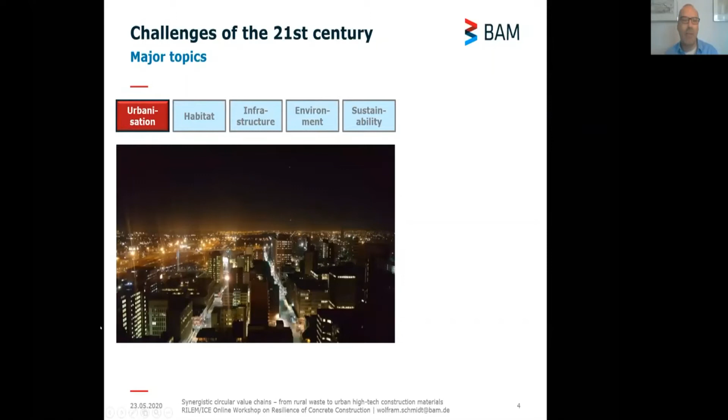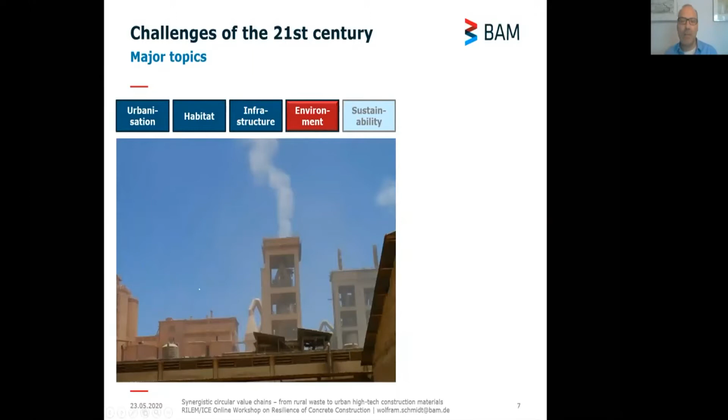We have to make sure that the growing population has a decent way of living, and people have to be connected, and the lifelines of human beings are infrastructures. But this all has an impact on our environment. And certainly we also have to discuss issues of sustainability as soon as we exploit resources.

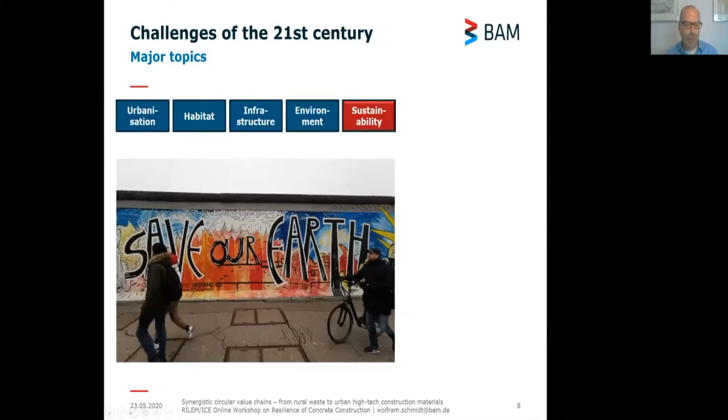If we take a closer look at these 5 items that I've mentioned, we will see that concrete has a prominent role in that, because it's involved in all of these items to a certain extent, because concrete is everywhere in the world. Everything we build is kind of linked to concrete construction. Some researchers found that concrete is about 50% of everything by mass that the world produces.

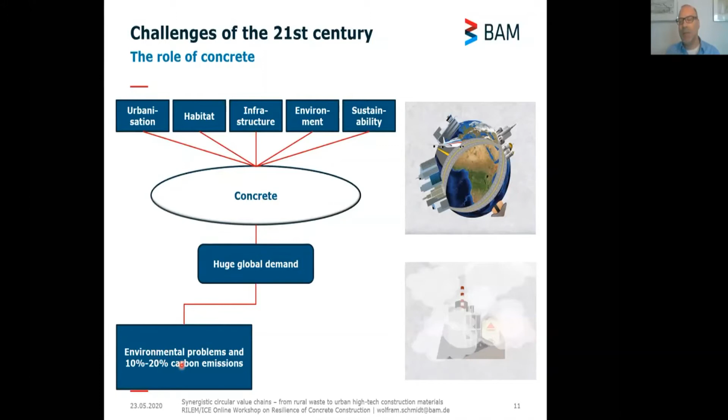That's a huge lot. And considering that, the 10 to 20% of carbon emissions that are being produced by the concrete industry globally are relatively small, but it's still a very high number. And the other thing is it's kind of inevitable because we don't have alternatives to concrete. Any other construction material is not available at the same amounts, and mostly it would be much more environmentally polluting and produce much more carbon emissions.

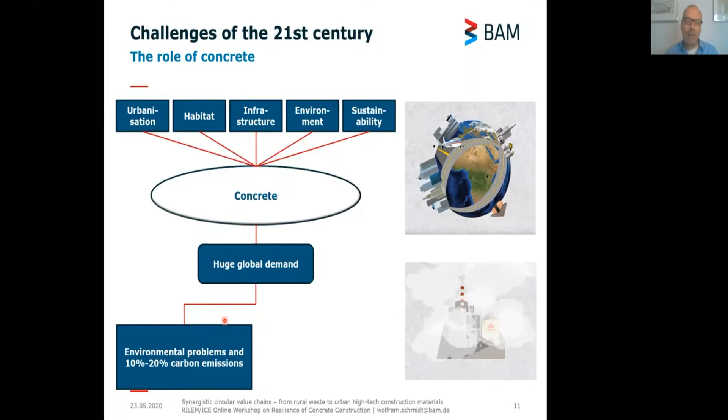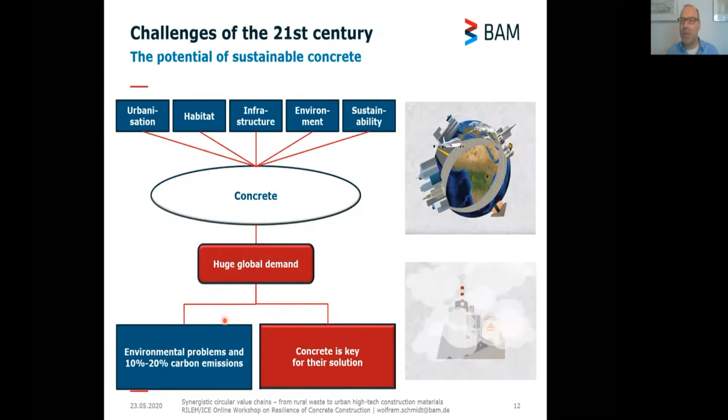So instead of complaining about this huge amount of concrete, we should also consider it as a potential, because if it is 50% of everything that the world produces, it's a high leverage if we can change something there. So let's see this as a potential and try to develop concrete technologies which are more sustainable.

Concrete technologies that use more sustainable cement types, better concrete types that use less cement but probably higher quality cement and concrete, and do the same but with much lower environmental impact.

And then urbanization becomes a very prominent role, because all the challenges that I mentioned here are linked to urbanization. We want to build houses, we want to build infrastructures to get the cities connected with the world, but at the same time, while we are building structures, we impact on the environment.

We change the environment permanently. And by changing the environment, we use resources which has an impact on sustainability. So urbanization is one of the key driving aspects we have to look at in the future.

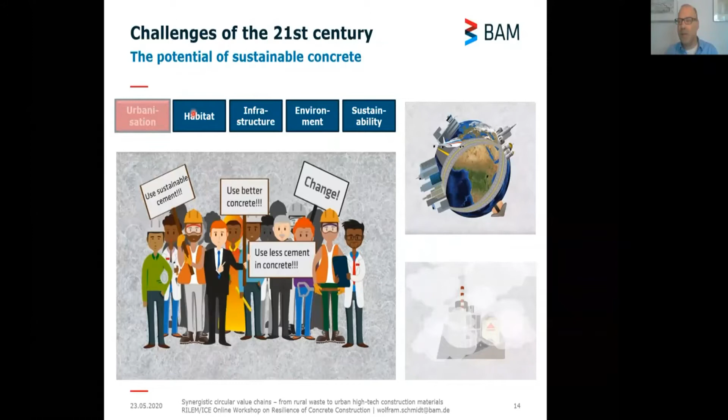And now, since this workshop is on resilience, and resilience is much considered as a structural issue, I think it is important to also discuss what resilience can also mean. Certainly, it means structural safety. We have to take care that the structures are durable, that they withstand the loads, and so on.

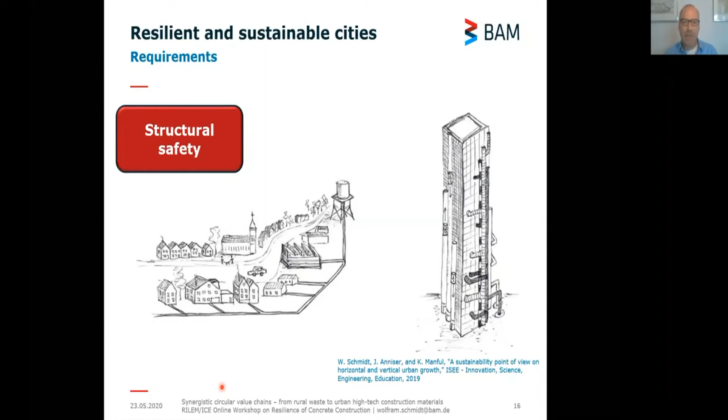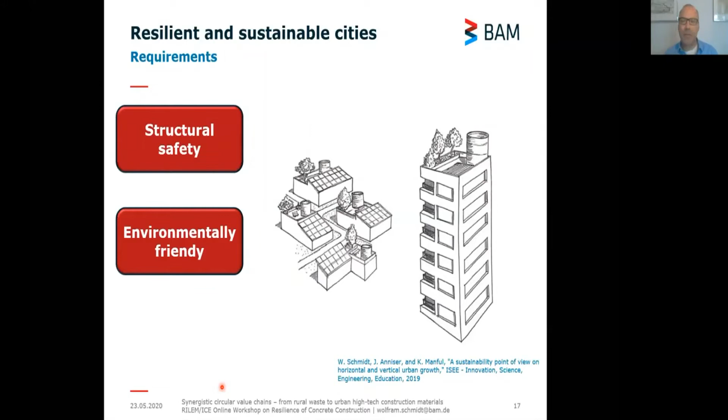But at the same time, in the future, we have to take more and more care that structures, concrete structures, urban structures, are more environmentally friendly. The entire life has to be more environmentally friendly in the future.

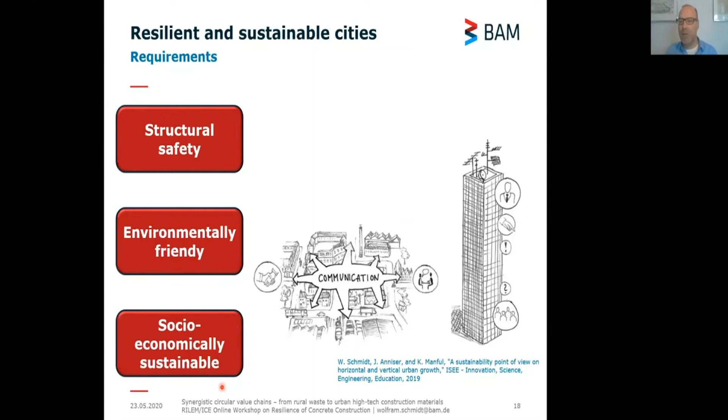But we also have to make sure that the cities of the future are made for the people, that there are livelihoods, that there are good communication paths, that they are integrative. And this all makes out a resilient urban structure, a resilient urban environment, and certainly also our concrete structures have to make sure that these parameters are fulfilled.

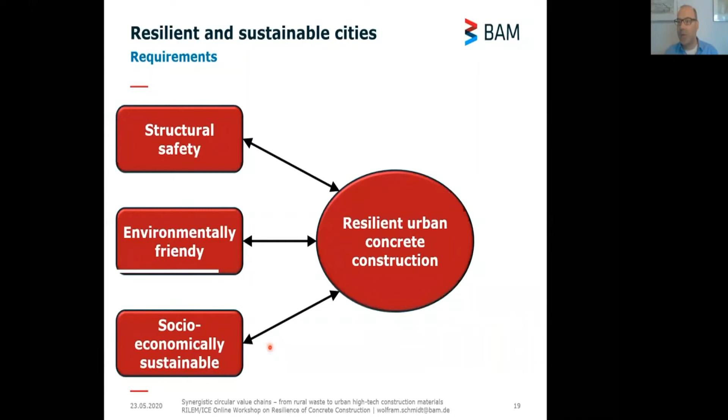So the problem is that this is wishful thinking, but urban structures today often are not like that. Therefore, we have to look at the future. Where will the urbanization processes take place in the future?

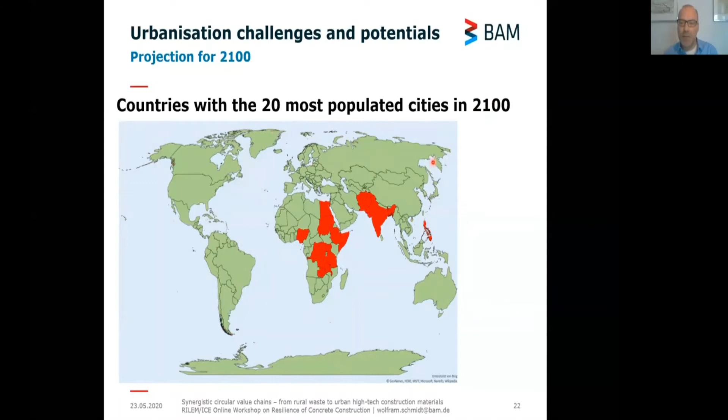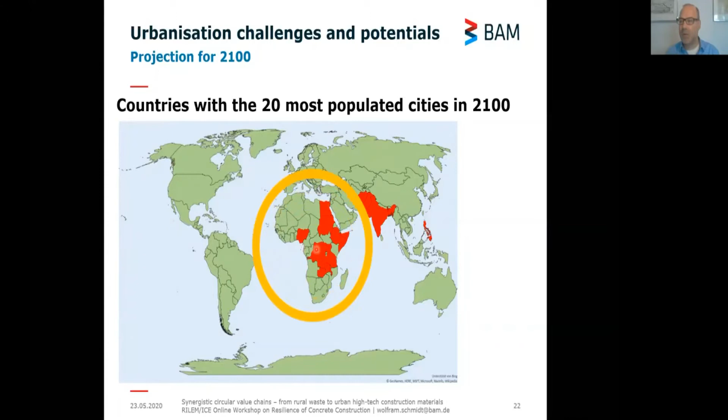Indeed, 13 out of the 20 most populated cities, according to this study that I've cited here, will be in Africa. This will be led by Lagos, Kinshasa, and Dar es Salaam, with 88 million, 83 million, and 74 million inhabitants respectively. So there is a dramatic development.

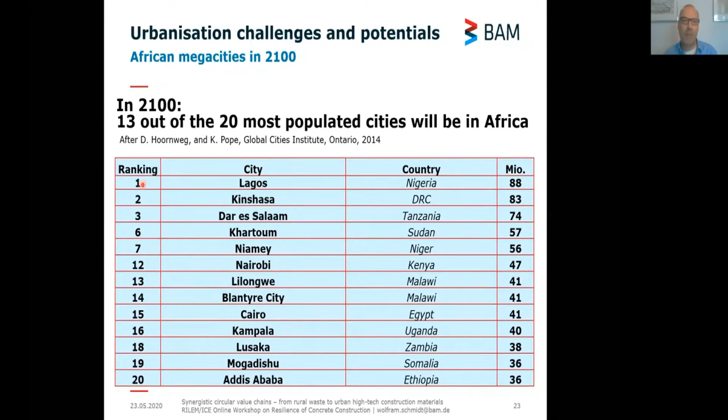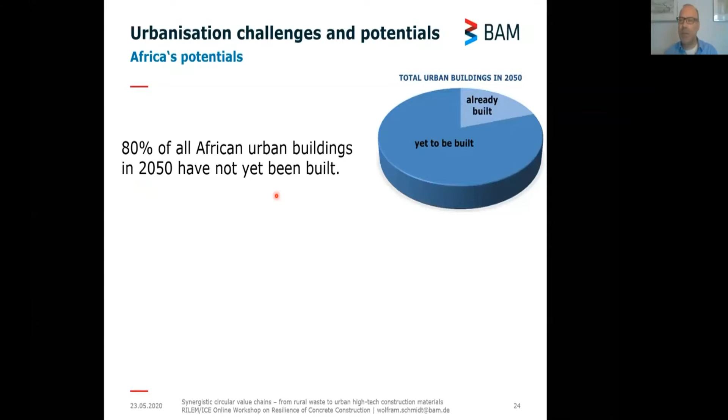And this certainly causes a lot of challenges, but at the same time we can see it as a potential again, because at the moment, from those urban structures that will have been built until 2050, only 20% are already existing. That means 80% of the urban structures which will be built over the course of the next 30 years are yet to be built. This is not much time, but it's a tremendous potential to build these structures more sustainably than in the past, to avoid the mistakes of people that built less sustainable structures in the past.

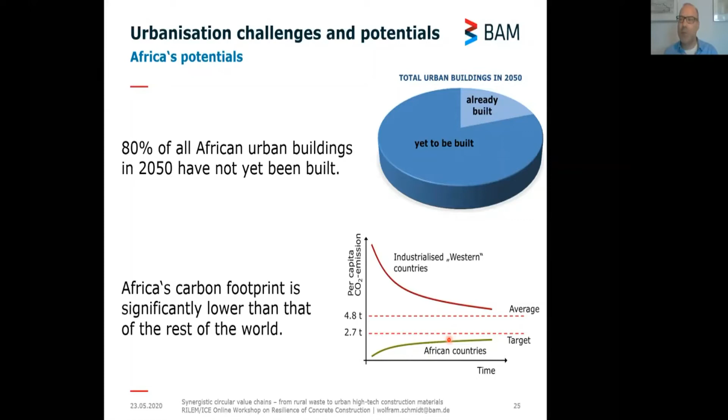Looking particularly at the African continent, it offers a lot of potential because, unlike the rest of the world, the per capita carbon emission, let's say the individual carbon budget, is significantly lower than in the rest of the world. Some studies say there is an individual carbon emission budget of 2.7 tons to avoid our temperatures increasing by more than 2 degrees Celsius in the coming years. Africa is the only continent that can reach this threshold from below; all other countries have to come down to get to this threshold. So the potential position of Africa to be innovative, to be more sustainable, is tremendously good.

But it's not only the urban areas that are growing, it's also the rural areas that are growing. At the moment in Africa, only 40% are urban and 60% are rural, but the average annual urban growth in sub-Saharan Africa has only been 4.13% in the past 20 years. It's not that there is an exodus from the rural areas to the urban areas — the rural areas are also growing — but the cities just grow so much faster, more than 2 times faster than the rural environments.

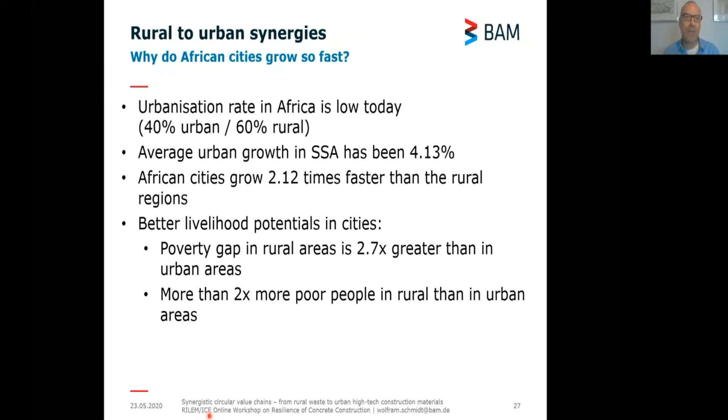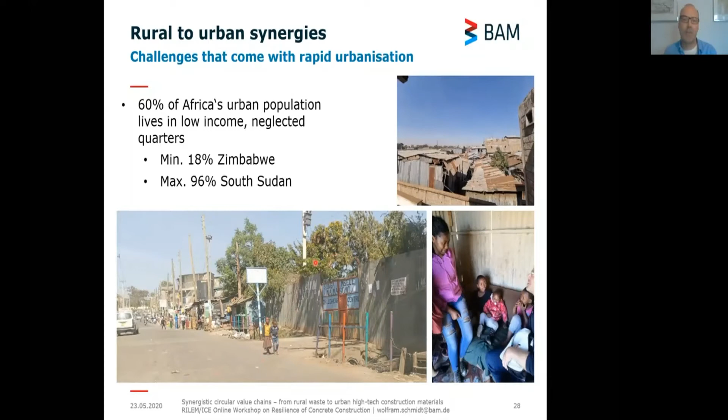On average, all over the African continent, about 60% of the urban population is living under very miserable conditions. In Zimbabwe it's not that bad, but in South Sudan it's really dramatic, with 96%. This is a majority of the urban population living under these conditions, and these people should probably have a voice.

Last year, I did a workshop at the Star Kids Initiative with children from Mukuru. It's a place which, in Western societies, people would probably call a slum. These children are collected from the streets, and Star Kids tries to get them back into a good education, to mentor them and to foster their talents.

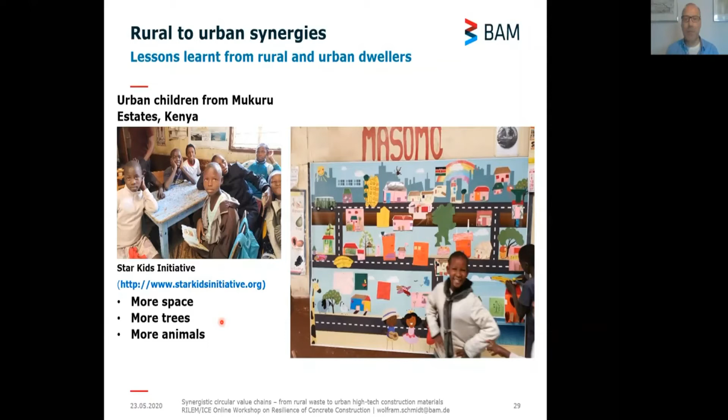We did a workshop and asked them, what is the city of the future? Here on the right side, you see how the children dreamt of a city of the future — this is more or less what we crafted over the course of the workshop. One of the results was that the children were dreaming of more space, more trees, and more animals. If you think about that, this resembles pretty much a rural setting rather than an urban setting.

Just a couple of months ago, right before this entire corona thing started to spread all over the world, I was in Tanzania, in Bagamoyo, which is a rather rural setting, and I did a workshop with girls and young women from Bagamoyo at the Forward Step organization. They are trying to mentor young girls and young ladies, and we did a workshop on science and engineering and women in science and engineering disciplines.

But I also asked them how they would dream about the environment in the near future, and it was interesting that they said they dream of short distances to services, a health infrastructure, and access to education.

So this resembles pretty much like an urban setting. This could be considered a kind of paradoxon, or you could also say everybody is dreaming of the greener pastures on the other side of the fence. But basically, it is not a paradoxon. You just have to consider how we can sort out this problem.

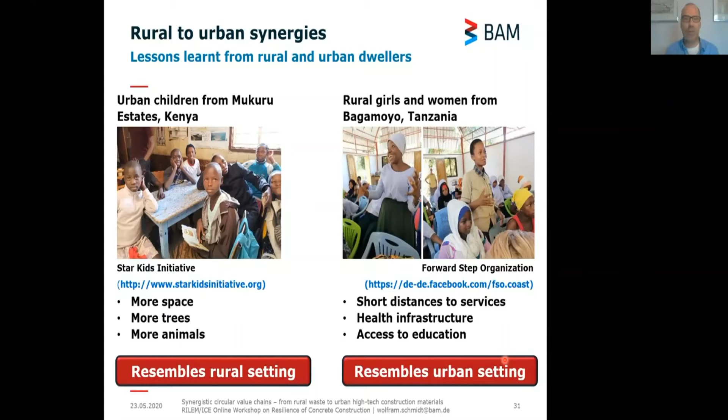One thing is to slow down the overdevelopment of already developed regions. We should also put resources into accelerating the development of rural regions. And in order to fulfill both of these requirements, we have to think about new ways. But at the moment, there are little driving forces.

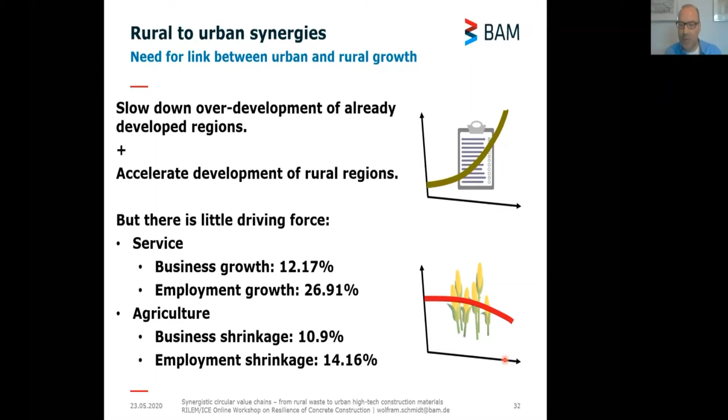We can see that in sub-Saharan Africa, the business growth and the employment growth in service was 12% and 27% respectively, while service is a very urban business. Agriculture had a shrinkage in business of 10.9% and a shrinkage of employment by 14.16%. So there's no driving force to invest into the rural regions, while at the same time there's a lot of driving force to invest into the urban regions.

So what is required is to develop synergies between urban growth and rural development. It's getting pretty clear, because urban growth requires concrete, mainly high-performance concrete for vertical growth as well. The entire world requires better concrete technologies, more sustainable concrete technologies. This will be to the benefit of the entire world.

And what do the rural areas provide? This is a vast amount of waste from agriculture and from mining, but I will focus on agriculture. If we can create synergies, the way to get these done is to develop high-performance construction materials coming from rural areas, and this will be to the mutual benefit of the rural areas and the urban areas, but at the same time the entire world will have an advantage from this.

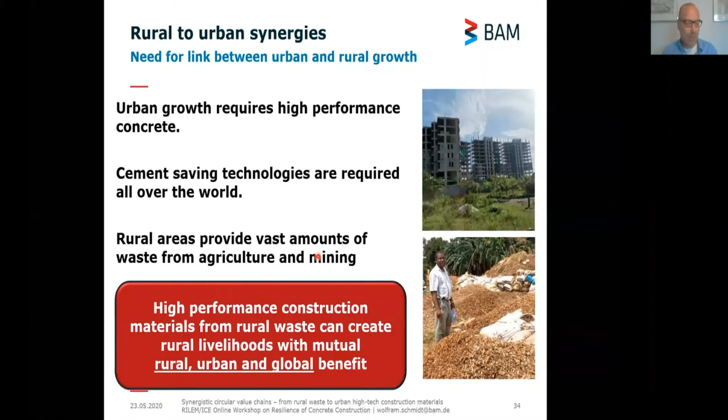So how can these solutions look like? At the moment, if we take a look at sustainable concrete technologies, we try to save cement as much as possible and replace it by supplementary cementitious materials.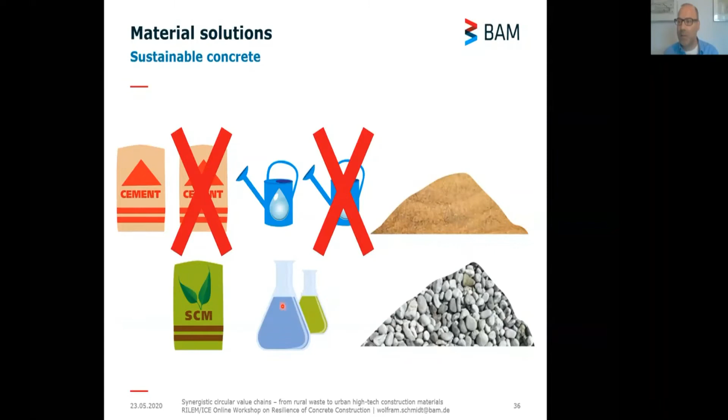And then we try to reduce the water content as much as possible to tickle out the highest performance out of the binder in the concrete. So we want to reduce the water-cement ratio. And this is what we're doing by using chemical admixtures that manipulate the rheology, that make concrete more flowable.

And then Africa becomes all of a sudden very interesting, because about 60% of the globally available unused arable land areas are in Africa. By the way, another 30% is in South America, and the rest of the world only shares 10%. So agriculture is extremely interesting in Africa and in South America.

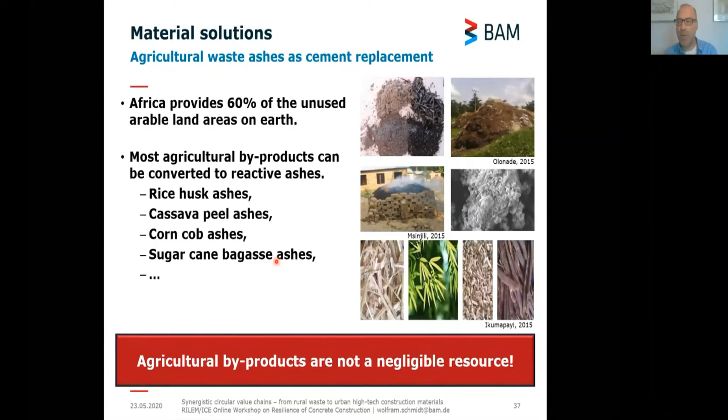And most agricultural byproducts, the wastes of food processing, can be converted because they contain reactive alumina and silica, like rice husk ashes, cassava peel ashes, corn cob ashes, or sugarcane bagasse ashes, and many more. So this can become an interesting technology. In most African countries, this is not a negligible resource, even though maybe on a global scale this might have a lower impact. But in specific regions like South America and Africa, this is really interesting.

But the problem certainly at the moment is that typically these farm products are produced in smallholder businesses all over the continent, and the supply chains to collect them, homogenize them, and provide a steady supply are lacking. So maybe agricultural waste ashes as a cement replacement are better suited for smallholder concrete production, or even large scale concrete production, but better used right in concrete production when you can collect these ashes from the neighborhoods, rather than bringing them to the cement plant, which would require a lot of investment into supply chains and infrastructure.

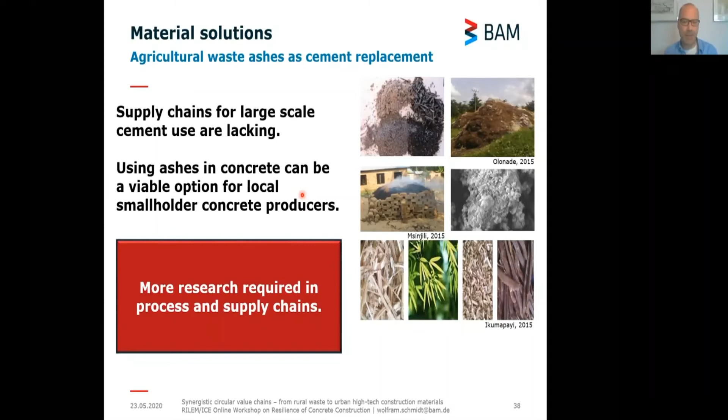But there's a lot more research required in this, particularly in the process technologies, as well as in the supply chains. And the other aspect I was talking about were the chemical admixtures. All those agricultural wastes, before they can be converted into a reactive ash, often contain a lot of organic components, which can be converted into a chemical admixture.

For example, we found out that cassava starch, other than potato starch, has a liquefying effect while still increasing the robustness. Here you can see the torque in a rheometer increasing with the dosage of potato starch, but the torque is decreasing with cassava starch. So the system is getting softer and better, and has a better workability. Also, acacia gum is very interesting.

It even outperforms polycarboxylate ethers in plasticizing cement and concrete systems. You can see the torque versus dosage here: this is a polycarboxylate ether, this is an acacia gum. But the specification is that in the beginning it's stiffening, and only beyond a certain dosage, and also at some critical water-cement ratios, they start to liquefy dramatically.

We also found a gum from Central Africa which can dramatically increase the thixotropy, as you can see here. Here you can see the torque at constant shear rate and how it dramatically goes down upon shear. These materials are so remarkable that you can make a concrete super liquid for a minute, and a minute later it's stiff. If you shake it, it's getting liquid again.

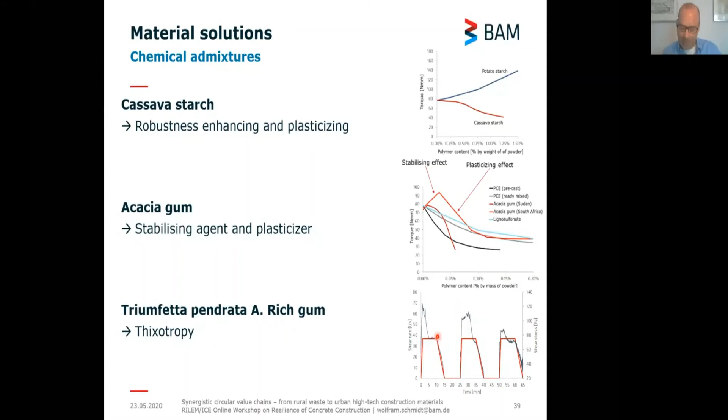It's really amazing. So these polysaccharides are extremely interesting, but they're also complicated. Much of their performance depends on the hydrodynamic diameter, the molecular mass, the zeta potentials, and also on the ions surrounding these polymers. There are also influences from the fertilizers, the regions, the specific species, the soil type, weather, and time of harvest. So it is super complicated, but it is also super promising.

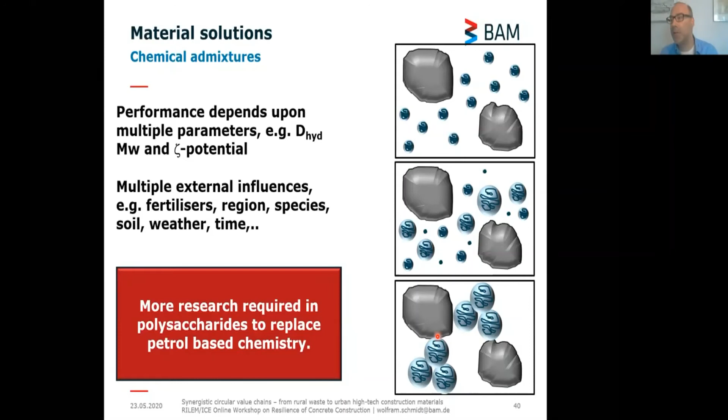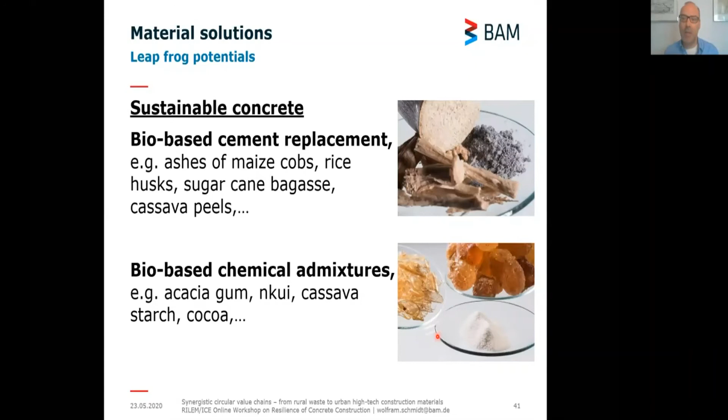I think we have to invest much more in researching and developing polysaccharides that are able to replace petrol-based chemistry, and Africa and South America are interesting places to start and to pioneer that. Sustainable concrete has a dramatic leapfrog potential in rural areas, particularly in the global south, if we replace cement with bio-based wastes like the ashes of agricultural food processing. At the same time, we can develop chemical admixtures that can replace our traditional, typically petrol-based chemistry.

In order to emphasize this, I would like to give a short case study for the case of Nigeria on the use of cassava waste. Cassava is something which can be found everywhere in the southern hemisphere. It's the third most important starch source in the world. In other parts, it's called tapioca, mandioca, or manioc.

You can see here on the right side how production grew from 1961, in light blue, until 2014, in dark blue. In Africa, it dramatically grew. Also in Asia, it's getting higher and higher importance. In South America, it's kind of stagnating. So you can find this everywhere, and Nigeria alone produces 20% of the global cassava demand. This is a huge resource.

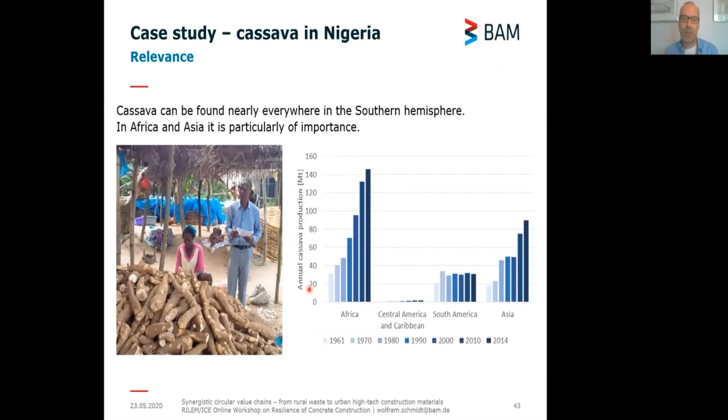What's happening today is that cassava is harvested, and after the harvest it's peeled. The peels typically make out something like 10 to 20% of the tuber, and then the inner part of the tuber is further processed into a food product. So there's a lot of waste. And since this waste cannot be digested by animals, it's typically just dumped away, where it requires space, pollutes the environment, and stinks - no one wants to live in the vicinity.

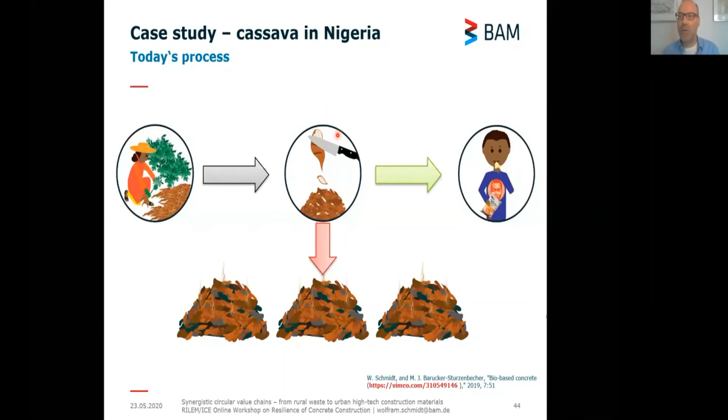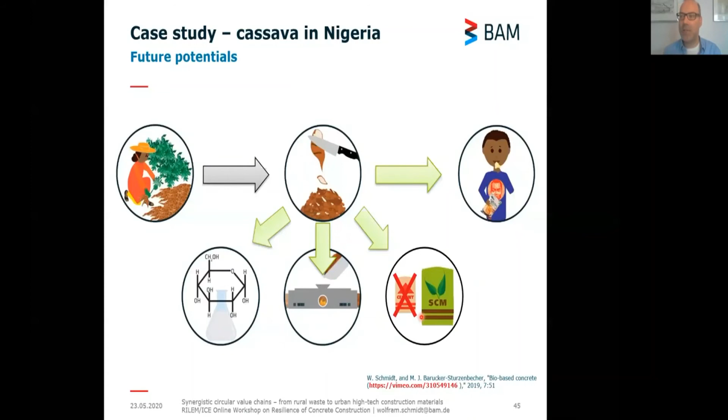But instead of dumping them away with no further value, it would be possible to develop an organic component that helps reduce water in concrete. It could also be used for co-fueling, and eventually the ashes of these cassava peels are reactive - they are pozzolanic, so they can help replace cement in concrete. So with something that formerly had no further value chain, it's possible, only based on the waste, to produce one value chain in the chemical construction business, and another value chain in the mineral binder business. These two value chains are not even competing - they are synergistic.

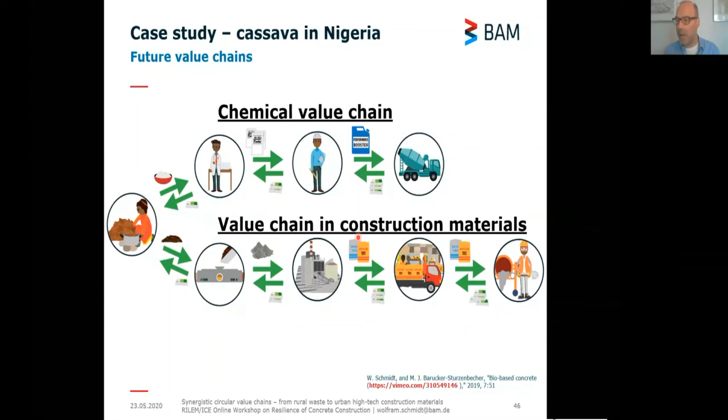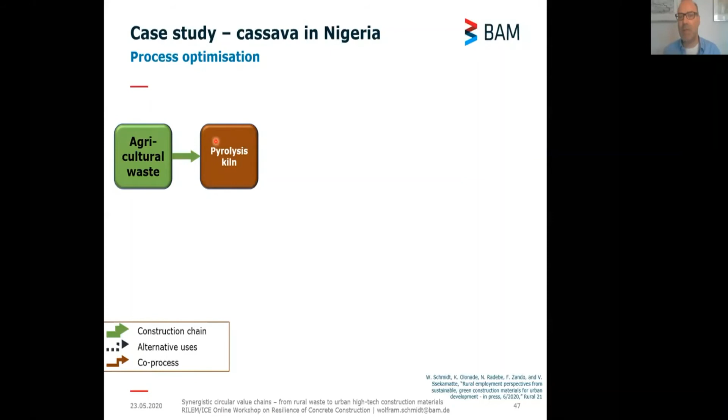If we want to optimize this process, we can discuss different concepts. I would just like to introduce one concept which could be very interesting. If there is agricultural waste, this waste is first given a pyrolysis step, where we can produce pyrolysis oil, pyrolysis gas, and biochar.

The oil can be converted into a chemical precursor that could go into the asphalt industry, and from there to urban construction. The biochar could either be used as agricultural fertilizer, or, if it proves to be a reactive product, it can also be used as an internal fuel, for example in a vertical shaft kiln, where green bricks are converted into finally burned bricks.

If there's no pyrolysis kiln, the agricultural waste could directly go into the vertical shaft kiln as an internal fuel. Then this pyrolysis gas can certainly be used to produce energy, or it could fuel the vertical shaft kiln. What comes out of the vertical shaft kiln, in the first instance, is the burnt brick, which goes to urban construction anyway.

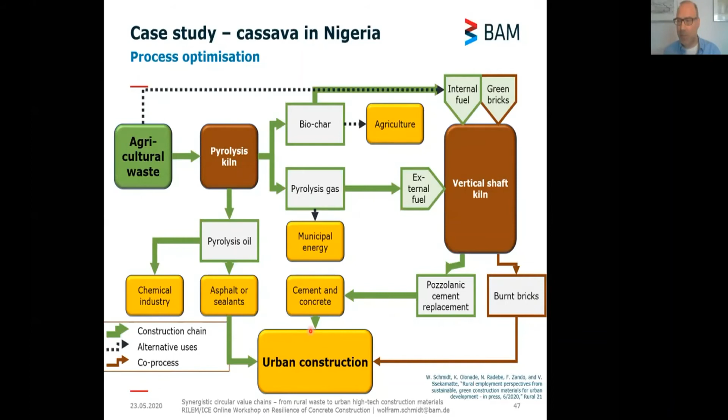But secondly, this internal fuel coming from agricultural waste can be converted into a pozzolanic cement replacement, and from here go to the cement and concrete business, and from here to urban construction. So this is just one example of how this can be optimized entirely.

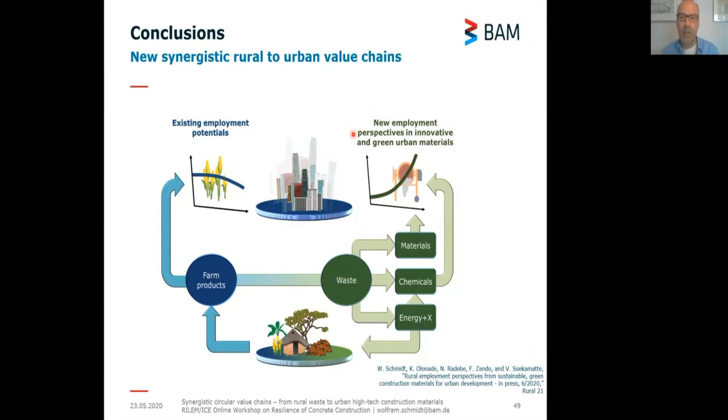Now I would like to summarize briefly. What's happening today is that rural areas produce farm products and they go to the urban regions, but there's not really a lot of potential for the rural areas to grow. But if these farm products, the wastes of them, would be used and converted into materials, chemicals, energy, and probably also some other chemical precursors, this could create a lot of new employment perspectives, and it could produce more innovative and green urban construction materials. This way, urban growth can significantly contribute to the development of rural areas.

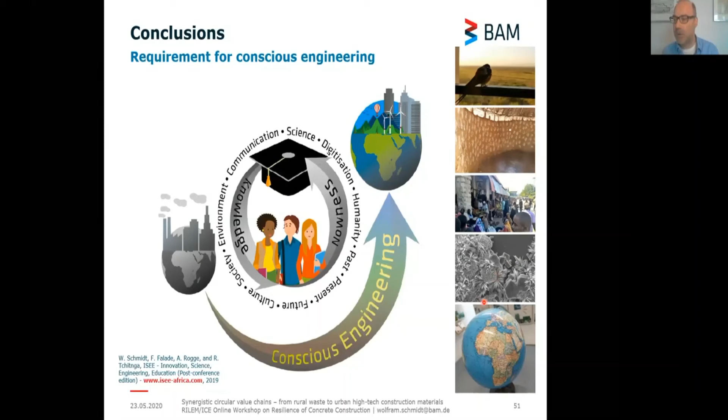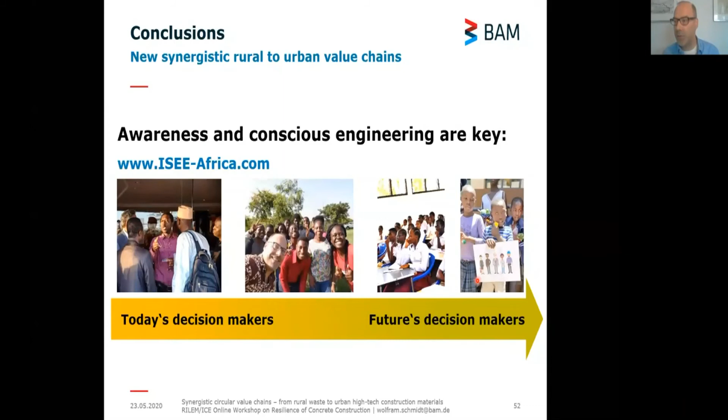We can get there, but not only by creating such a new generation of conscious engineers within the decision makers of today, but we also have to already talk to the decision makers of the future, to the students, to the school kids, and even to the smallest, to convince them that they can be the change drivers for a more sustainable future and a less environmentally polluting environment.

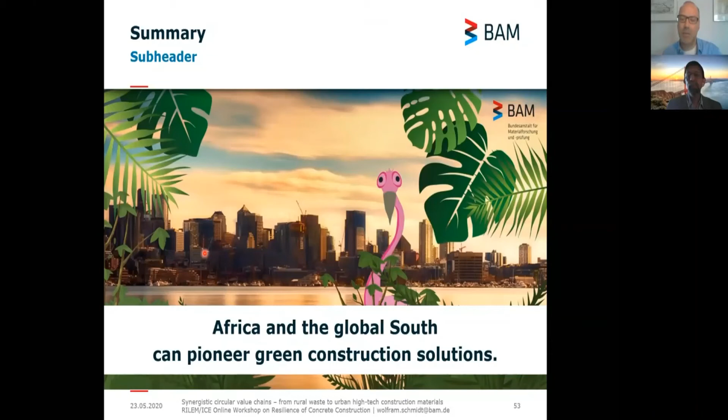And with this knowledge and with that approach, Africa and the entire global South can pioneer green construction solutions in the near future. And with that, I would like to thank you very much for your kind attention.